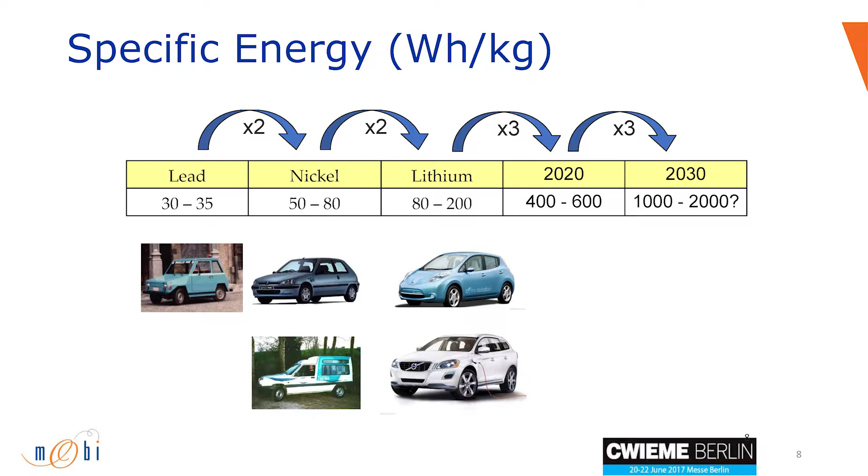But then later, in the 90s, the first mass-produced vehicles came on the market with nickel metal hydride batteries, already doubling the capacity. Then we all know the later generations with the Nissan Leaf and so on, based on lithium batteries. There again, capacity doubled. And now towards 2020, we probably will see something like 400 to 600 watt-hours per kilogram on cell level. That will be in the next generation cars.

And we see post-lithium 2030, what will happen then? We might even go further. So the range is still a little bit of an issue, or at least range at an affordable price is still an issue, but it's going to vanish in the coming years.

As you can see here, the evolution of the battery price the last 5 to 6 years decreased from $1,000 per kilowatt hour to 200 and a little bit nowadays. And it's foreseen that by 2020, probably the cost of a battery pack will be about €100 per kilowatt hour. So it's going really down.

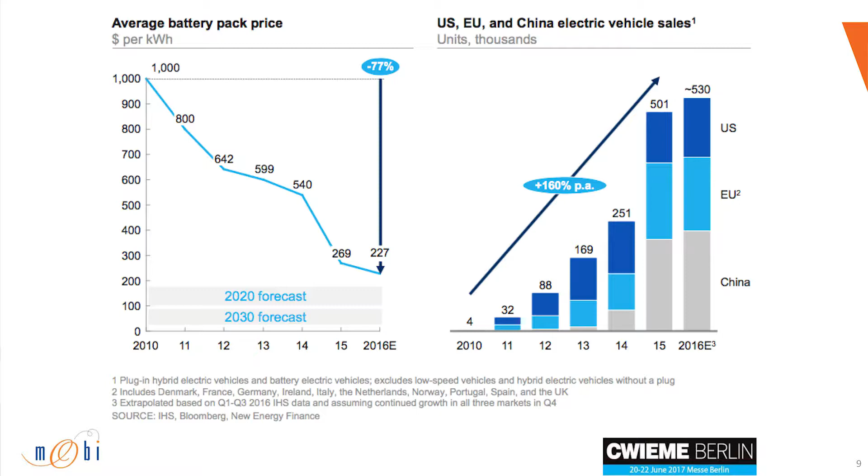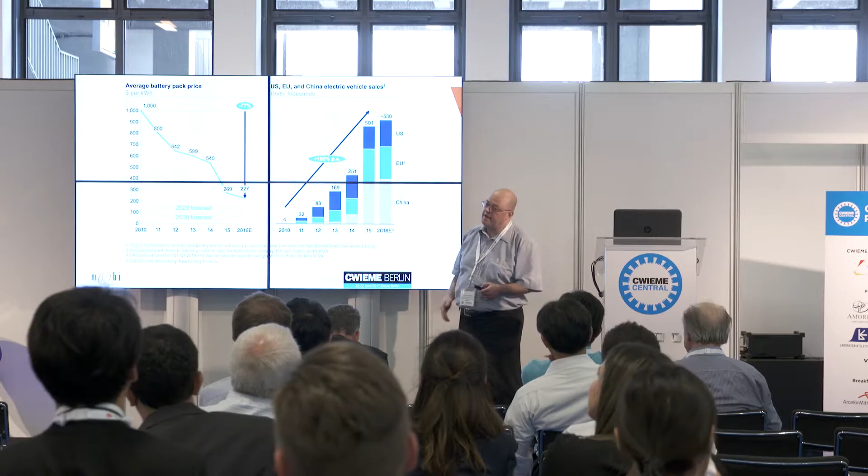And you can see this in the increase of sales of electric vehicles, that it's still a small market share, but the climbing is steep. So they're gaining market share.

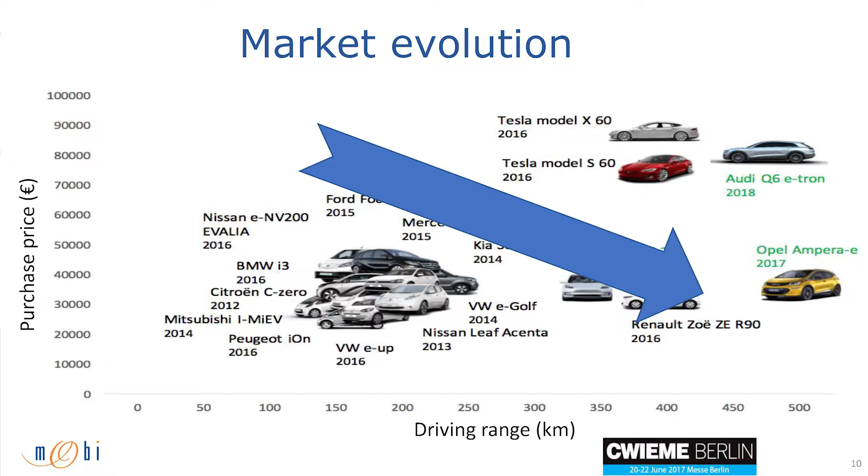What you can see is that the last generation a few years ago were basically in this part of the market with a limited range, like 120 to 150 kilometers, at an affordable price of 30 to 40,000 euros. This was the biggest market segment that was there. And if you wanted a higher range, you had to go to a Tesla or something, and pay like 80,000 euros.

And now what we see is this new segment in the market that's coming up: affordable cars, 30 to 40,000 euros, with longer range, 300 to 400 kilometers. And it's generally accepted that 300 kilometers is a kind of tipping point that would make customers willing to buy an electric car, as it would mitigate range anxiety at that moment.

And there are different models coming up, the Renault, the Opel, but also the Chevy Bolt and the Hyundai Ioniq. So there are changes in the market. By the way, if you want to know how sales of cars are evolving and how infrastructure is evolving in Europe, I invite you to go to the website of the European Alternative Fuel Observatory. There you can find all the statistics of all European countries on this.

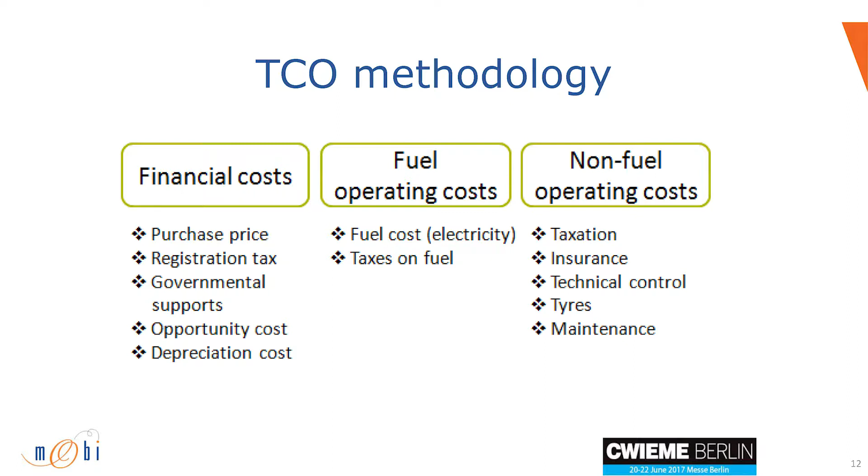Right, okay. So purchase cost at the moment is still a little bit high. But what about total cost of ownership? It's kind of a different figure, because purchase is higher, but operational cost may be lower.

So if we calculate the total cost of ownership, we not only have to take into account the financial costs, just as purchase price, taxes, depreciation costs, and things like that, but also look at operating cost, especially fuel cost, because it's half the price to drive an electric car with electricity than using fuel. And then, of course, you have some other costs that aren't that much different, besides maybe maintenance.

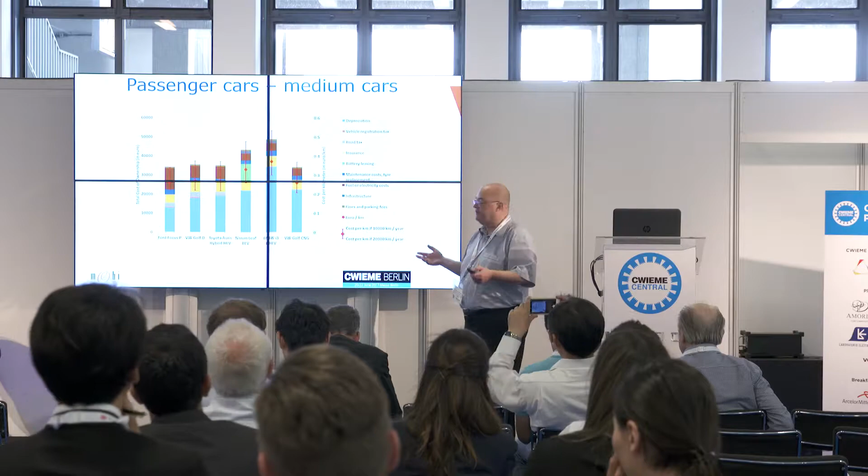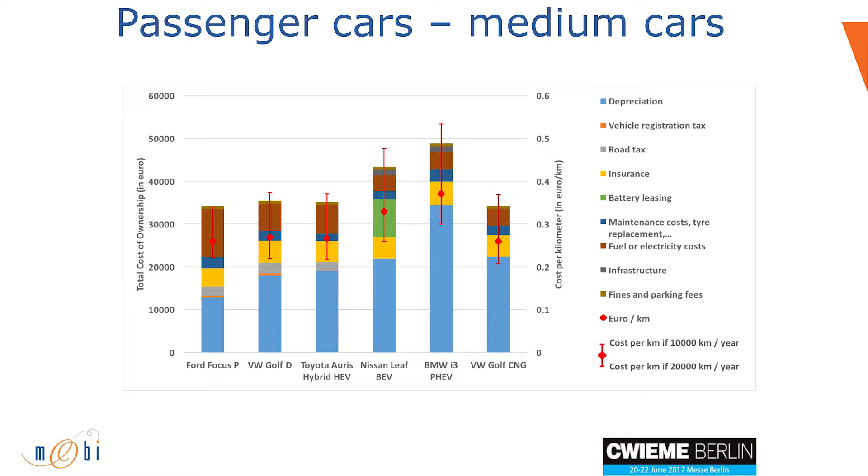But if you look at it, we did this for the Belgian market. For a typical medium-sized car, Nissan Leaf-like, we made a comparison of total cost of ownership between a classical diesel or petrol car and the Nissan Leaf and BMW i3, for instance. As you can see, there's a big difference in depreciation costs between those and the combustion engine equivalent, because nobody knows what the resale value of an electric car is after 8 years.

So it's hard to compensate. Here you see the fuel costs - they're definitely smaller here, but it's hard to compensate. So it's still a bit difficult. However...

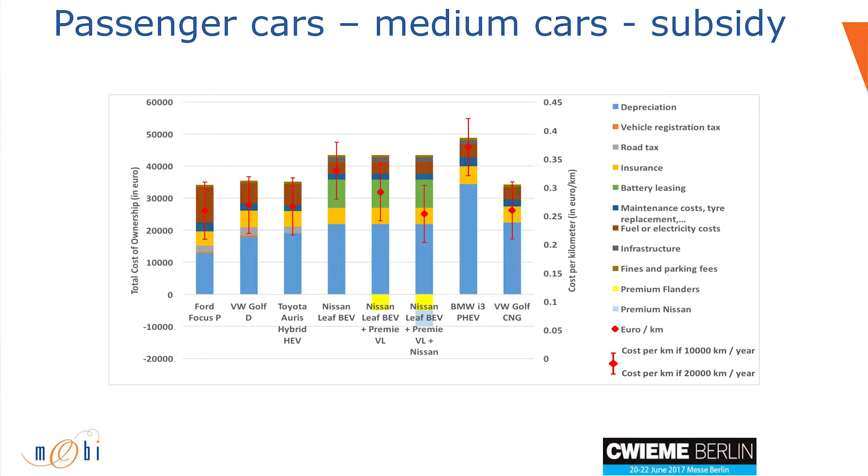if you look at incentives now in Belgium, well, in part of Belgium, the north part, the government started this year to give incentives, and you can see that at that moment the total cost of ownership becomes comparable to the other ones. Even more, if Nissan itself gives an incentive, it becomes really, really comparable. So if manufacturers and authorities work together, they can make it the same price, so that you can have a market breakthrough at that moment.

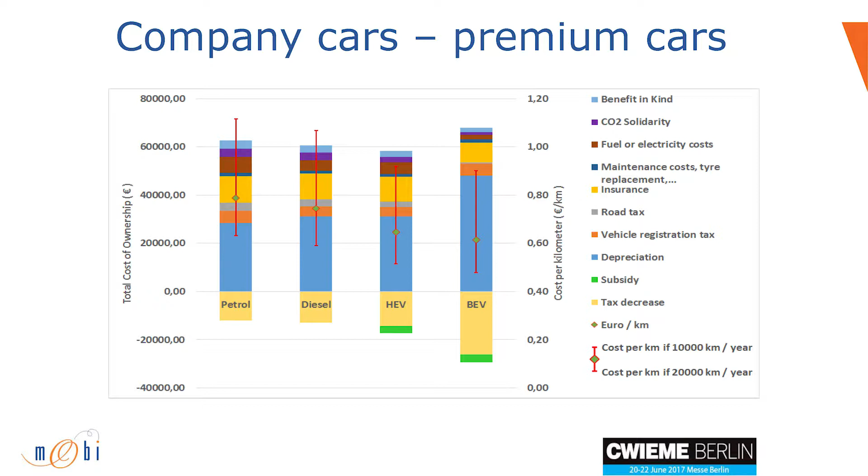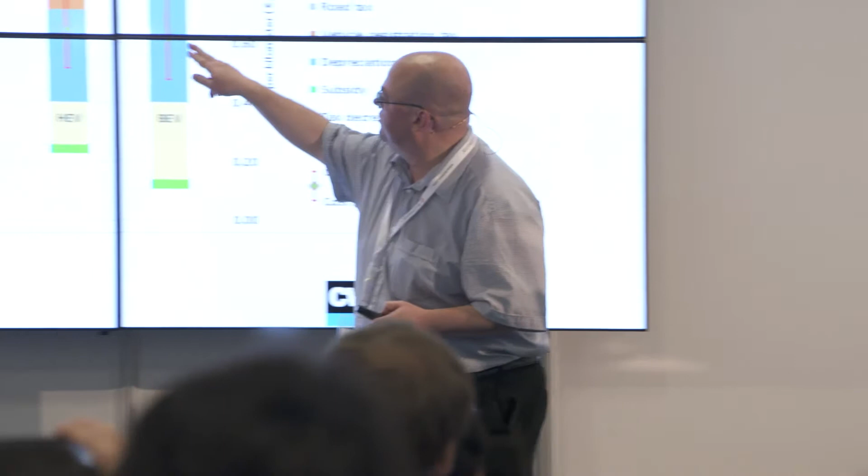Another thing in Belgium is that if you have a car for your company, you can deduct 120% of the taxes, and we can see this in the market for big cars. Here's a comparison of total cost of ownership of big company cars. The tax deduction makes this type of car really cheaper, even than a classical combustion car. That's why a lot of company owners now drive a Tesla in Belgium.

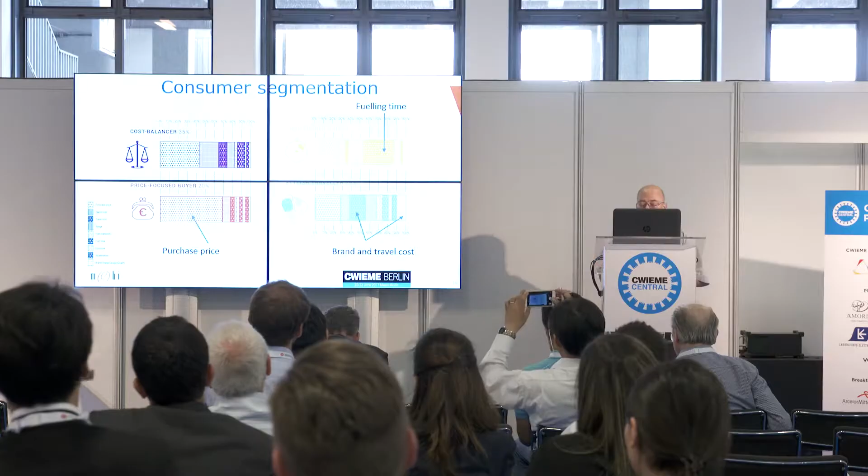Okay. So if electric cars are penetrating the market, who will be your early adopter? Who will be the first to buy such a car?

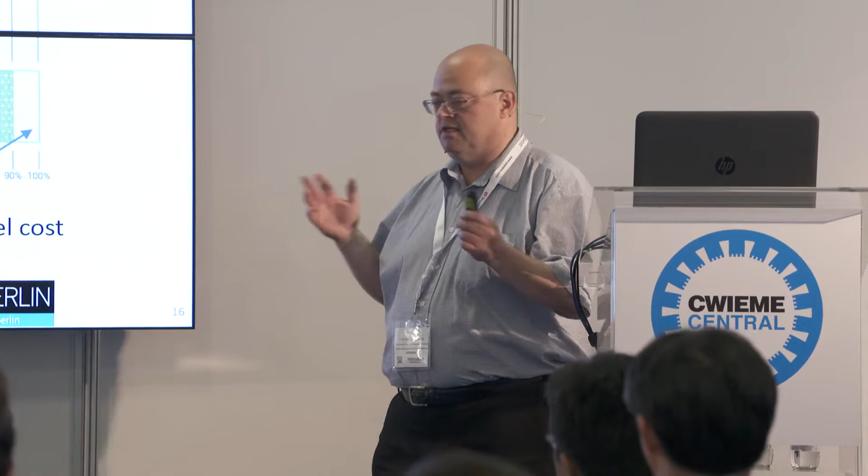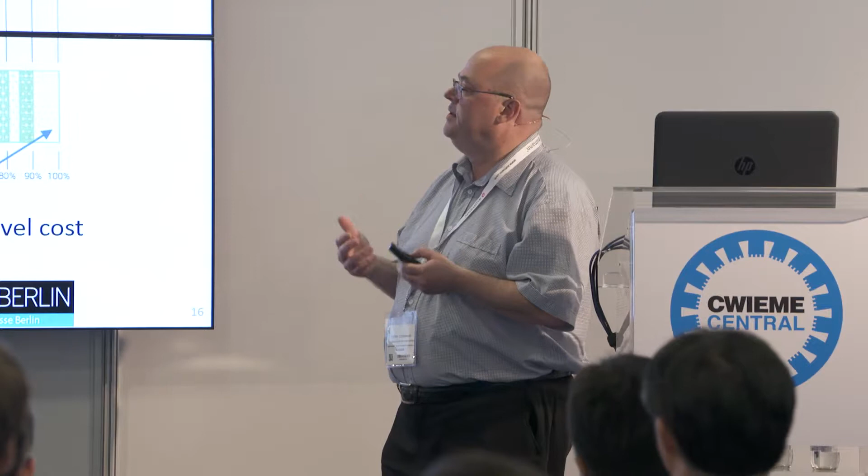Well, we did a choice-based conjoint analysis survey in Belgium, which allows you to understand the criteria somebody uses to make a purchase decision. We did this with 1,600 people in Belgium. Based on their preferences in buying a car, you can segment potential customers into 4 different groups, and see which one would be most likely to buy an electric car. So we split it into 4 kinds of potential customers.

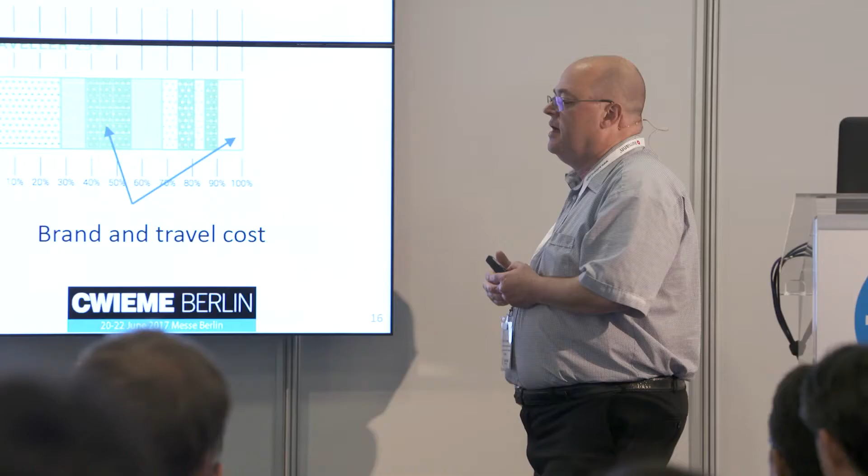First, there's the cost balancer. For him, the purchase price is important, but he also looks at the operational cost afterwards. So he really looks at the total cost of ownership - he's one of the first potential early adopters of electric cars.

Then you have another group, which is how a lot of people still think - somebody that looks only at the purchase price. It's too expensive, so they just don't buy it. They're probably the laggards in the adoption curve.

Then you have another group for which the fueling time is really important, so they don't want to change anything about their habits. They want to go, put fuel, 5 minutes, go on - and they're also behind. They will not buy immediately.

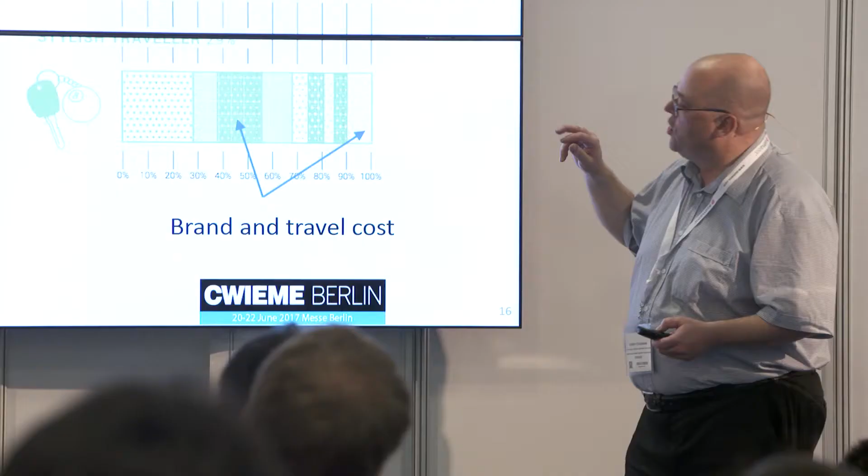Another group interesting for electric cars is the stylish travelers, who look a lot at the brand - it's nice and fancy to have an electric car. They're also an interesting group for manufacturers to target. Mostly this group and the cost balancer group are young, educated people with some money, rather than older people alone.

So yeah, this is just an overview. I will skip this because we're running out of time.

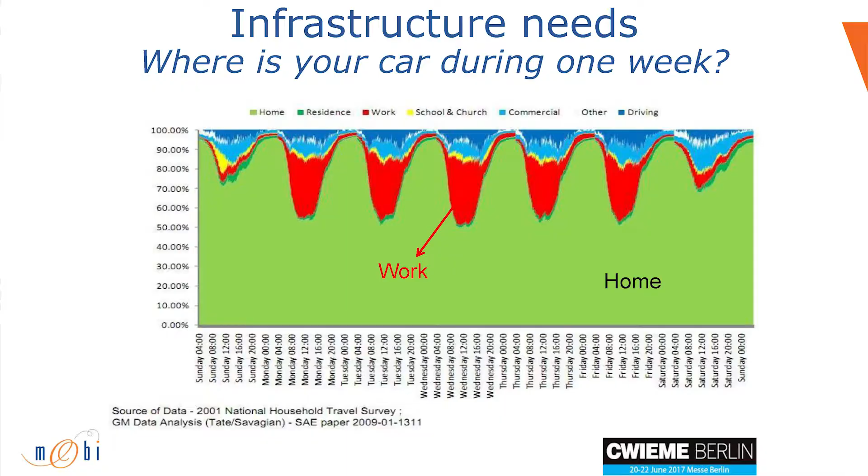Okay, last point: charging infrastructure. It is important to deploy the right amount of charging infrastructure in the right place. Now, where should we put this charging infrastructure? Well, for that, let's see what a car does during the day.

Here you see 7 days of a week, and the activities of the car. The first thing you can see is that most of the time the car is not driving - hardly 10% of the time is the car moving, mostly it's standing still. First conclusion: we can probably use cars for balancing the grid and things like that.

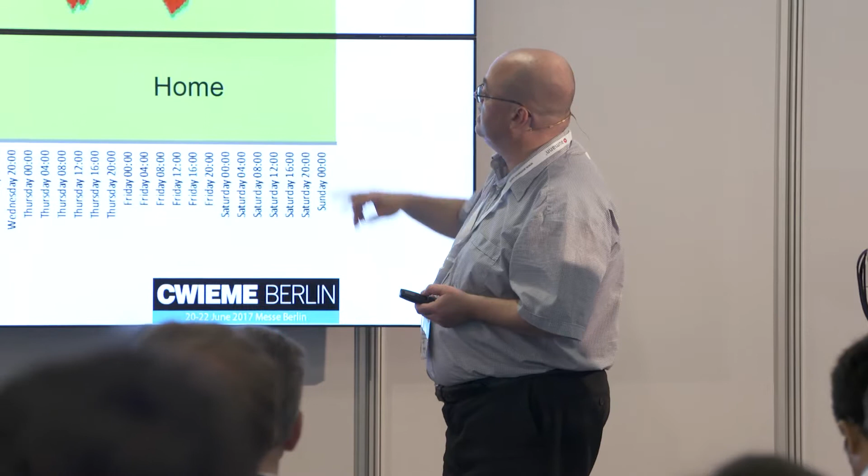Second, what we see is that most of the time the car is at home. During the week, of course, it's at work as well, and on the weekend there's some shopping. But most of the time, your car is either at home or at your workplace.

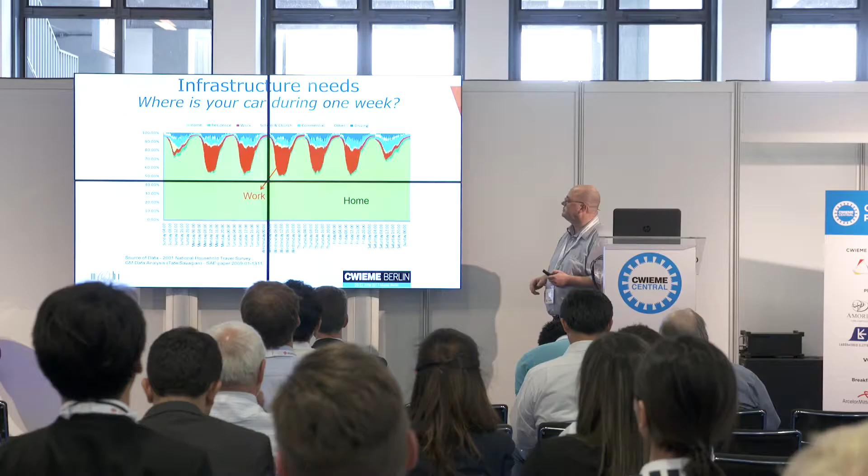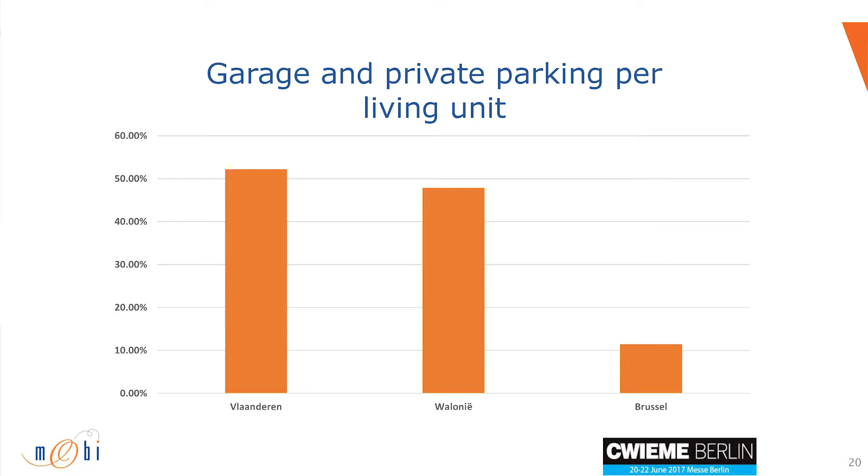This is something we did for Belgium. We have 3 regions in Belgium: the north called Flanders, the south called Wallonia, and in the middle we have Brussels. In 2 of those areas, 50% of people have a garage and can easily install a charger at home. In Brussels, it's an issue—only 10% have a garage. So there, they will need to rely on charging infrastructure on the street.

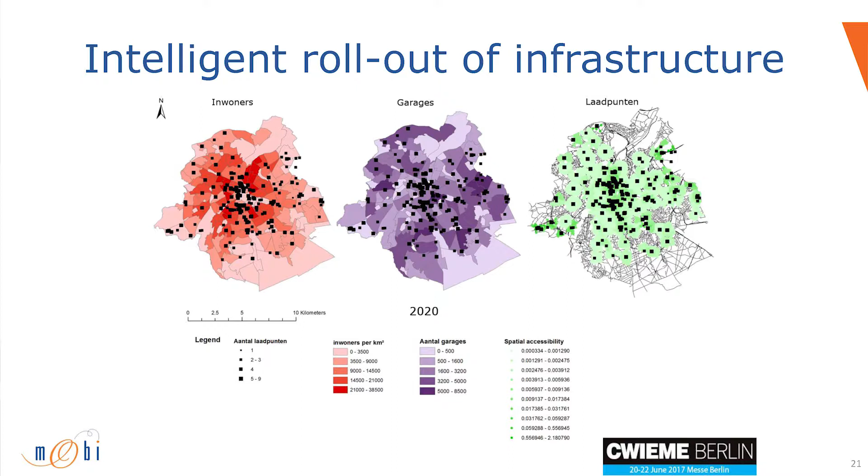Coming to that, we did a study based on GIS, Geographical Information System, for Brussels on where to put charging infrastructure. There you use data to see where possible early adopters can live, where there are no garages, where it's densely populated, where there are electricity lines, and things like that. If you combine those parameters, you can actually pinpoint places in the city where you should add charging infrastructure.

This was for slow charging, normal overnight charging, let's say. For fast charging, it's a bit different. Fast charging is rather focused on going from one urban area to another. We did a study for Belgium for that, to see where are the best areas. We have about 100 charging points in Belgium now, and we did a study on which are the best areas with respect to accessibility of fast charging.

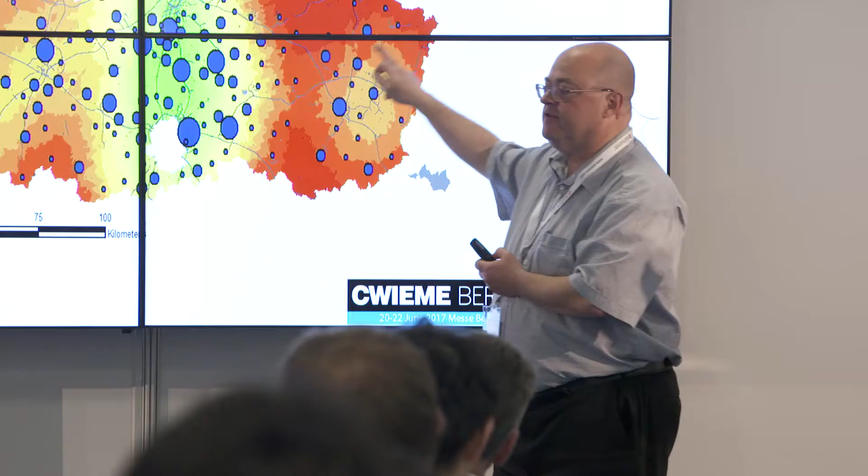You can see that the green area is the best accessible—it's the area between the main cities, Brussels and Antwerp. But these blue dots show where the biggest communities of electric vehicles are. For instance, what we recommend to our government is that here there are some big communities and no charging infrastructure. So we use this planning to develop and deploy fast charging stations in Belgium as well.

And then finally, the next step will hopefully be some inductive charging lanes that go from one city to another, but that's far future, I'm afraid.

Okay, so once again, a key issue in developing electric vehicles is total cost of ownership, among other things, so Omar will speak about that in his talk.

Yes, thank you, Thierry. It's my turn. I think Thierry took more time than we expected, okay?

Thierry mentioned that TCO is really a key issue, but we look behind the TCO: what is the correct design for the drive system of electric vehicles? So I will share my presentation: a small introduction to powertrain technology, our topology and modeling approach, the co-design framework, and then a small case study on what we did in Brussels. Then I'll make some conclusions and discuss future trends. So I go to the trend.

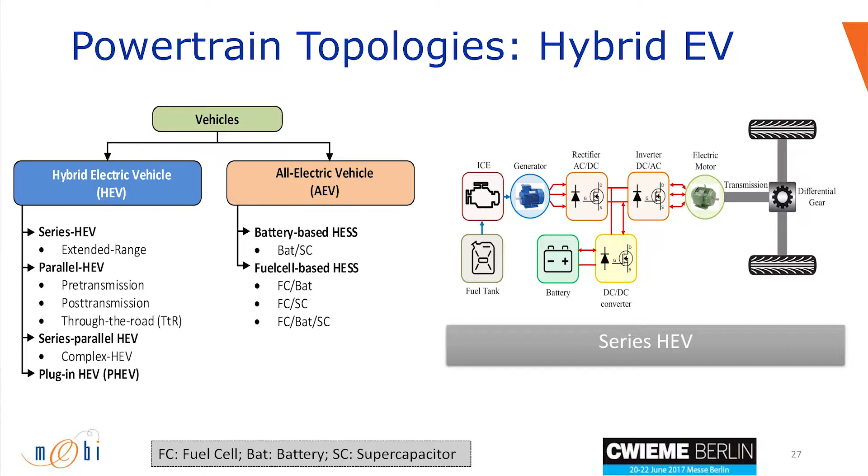What's the type of technology now? We talk about electric vehicle, hybrid. Hybrid electric vehicles can be classified as series hybrid, parallel, pre-transmission, post-transmission, and also front and rear connection via road. Then you have combined systems, called complex series-parallel, and plug-in hybrid. For electric, we call it all-electric vehicle, which could be battery-based, like Thierry mentioned, and we also have fuel cell battery vehicles, which could be classified as fuel cell battery, fuel cell supercapacitor, and fuel cell battery combinations. As you can see here, this is an example of series hybrid.

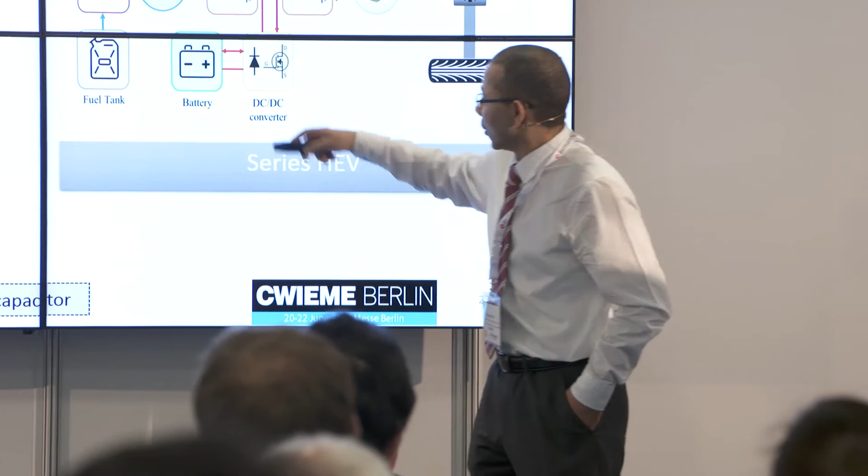I don't know, the pointer doesn't work. So the engine, then you have the generator, and rectification, then inverter to electrify this, transferring the electricity from DC to AC, and then the induction motor. Of course, to improve the performance of the engine, we have a battery integrated, and in this case we can improve the performance of the vehicle.

Second one is parallel. So instead of electric coupling, you have mechanical coupling between the electric axle and the engine axle. Again, we have a battery to improve the performance of the vehicle.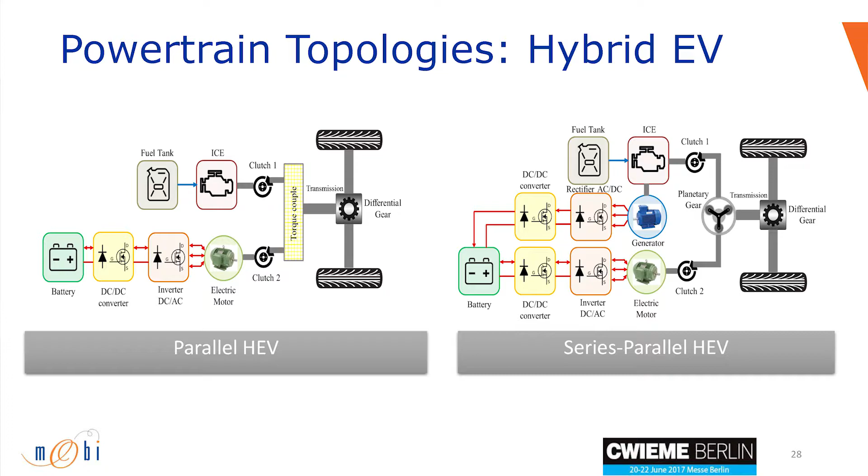And then we have the combined system. As you can see here, we have a planetary gearbox, a mechanical connection with the engine and the tank, and then the battery—two ways you could charge it, from the engine itself or use it for traction. So you have different modes, and of course the system becomes more complex, so you need energy management to manage these parts.

As you can see here, how we can improve this hybridization—you can start from a conventional vehicle. Of course, the conventional vehicle's engine has low energy efficiency. If you go to electric diesel, meaning series based on diesel, you can improve the efficiency slightly.

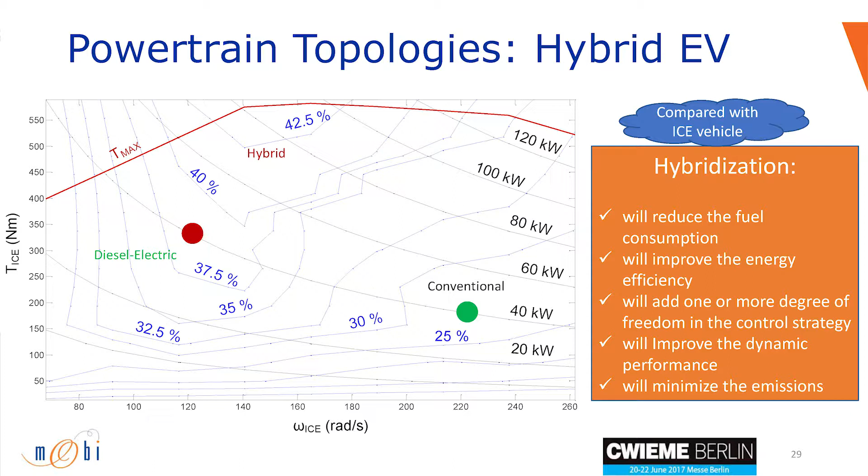And then you can go for hybrid, fully hybrid, and now we can reach around 41% or 42% efficiency. So there is a need for hybrid system.

So you need to integrate battery in the system. And how we can do that? Why? My answer is to improve the fuel consumption. That's one answer. And of course, to increase or improve the energy efficiency. And then you can make more degree of freedom to control the system. And after that, of course, you can gain also in the TCO. Of course, you also gain in emissions. Like Thierry mentioned, there's a huge impact on emissions, so we need to tackle this issue for climate change.

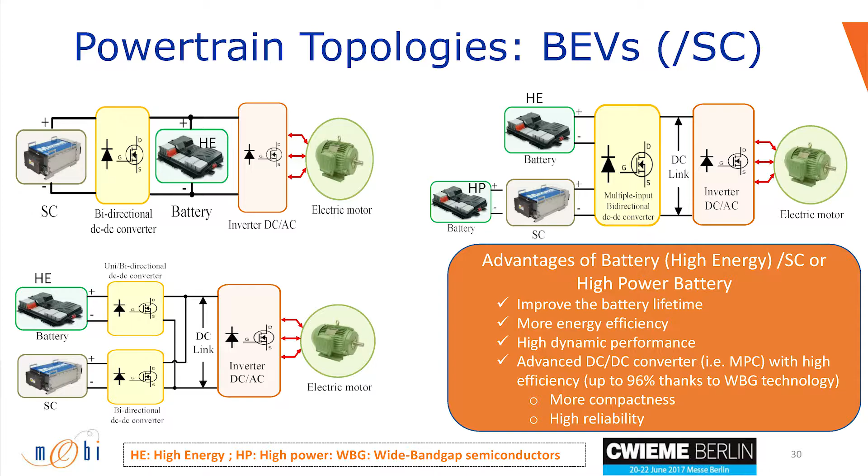And this is compared to conventional system. If you look at battery system, how we design the battery system and drivetrain - as you can see here, we have different battery types, high energy, high power. And if you use high energy, you need to assist the battery during acceleration, so you need to add a supercapacitor system. As you can see on the left side, the battery is the main traction system, and the supercapacitor assists the battery bi-directionally during charging and during acceleration.

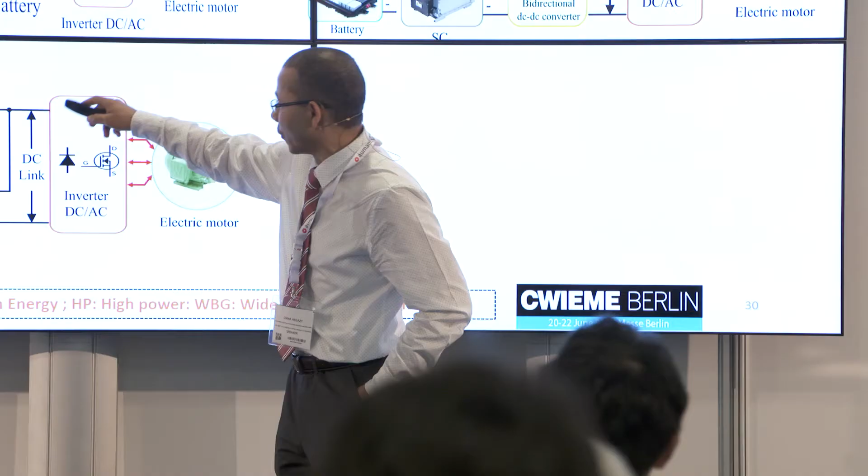And then we have another type of configuration, so we have a lot of configurations that give more flexibility due to the integration. So we need also advanced converters - multiple DC-DC converters, and then we have the supercapacitor. You have more freedom to control the energy coming from the battery and supercapacitor. And then we have other advanced technology - one common DC-DC converter that integrates the battery and supercapacitor. We use common thermal management, common or centralized control, as you can see here.

And then you can control that - battery goes here. So you can use a supercapacitor with a high energy battery, and then you can integrate high power with high energy. So we have more flexibility to control multiple sources to satisfy the needs of the vehicle. And then you have the advantages of this.

Hybridization, electric - so we can improve the battery lifetime. This is a key issue, so we need to improve the lifetime of the battery. And of course, this will lead us to increase efficiency, because if you improve the energy content of the battery, it means you gain also in the range. And then you can also include inside the DC-DC converter advanced technology like wide band gap technology, SiC technology, GaN technology, and now we can gain more in efficiency. Once you gain in efficiency, you can also improve the energy efficiency of the whole drive system. And of course, this brings more flexibility and also more reliability.

So how can we go for fuel cell? Thierry mentioned electric vehicles, but there's also fuel cell vehicles. So what is the challenge there? Looking at the fuel cell: low dynamics, high cost, high size, and no capability to recuperate energy from regenerative braking during driving. So there is a need again for hybridization.

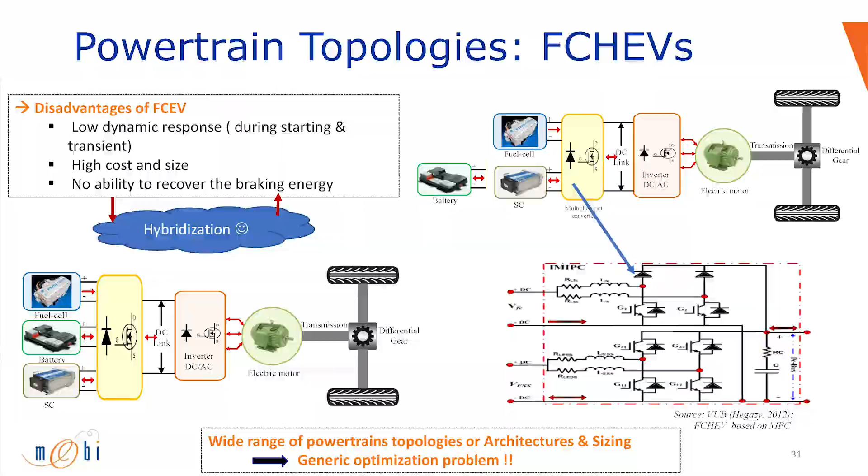So we need to hybridize this fuel cell with battery or supercapacitor. As you can see here is the first trend of fuel cell integrated with supercapacitor - we can gain in this traction system, or we can integrate fuel cell with battery with the same content of the drive system, or we can merge the three sources. Of course, it will give more freedom, but also more complexity in the control system. And this is why we can gain in this drive system with multi-port.

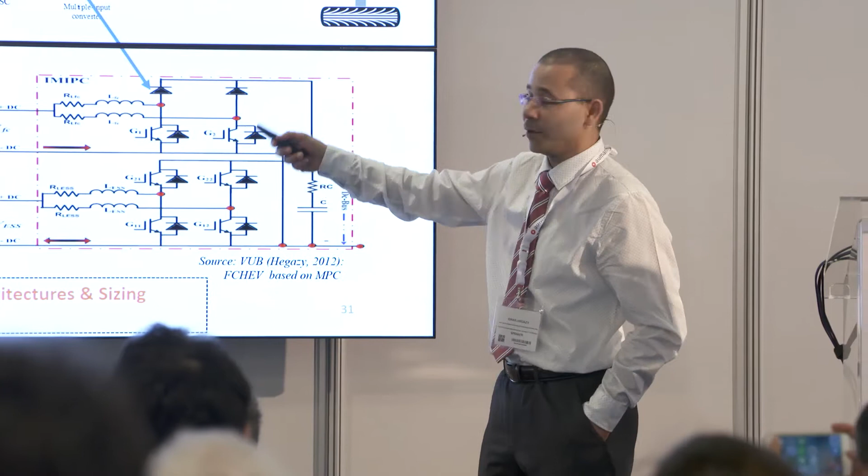We can use advanced technology like interleaved DC-DC converters that manage the energy transfer between the sources and the traction motor. So I'm going to share with you the modeling - how we design the drive system, how we make modeling that fits our design and also delivers the needs of the user.

So we need to highlight that there is a need from the user to achieve TCO minimization, and also energy management or energy efficiency should be higher. So I'm going to show how we can do this.

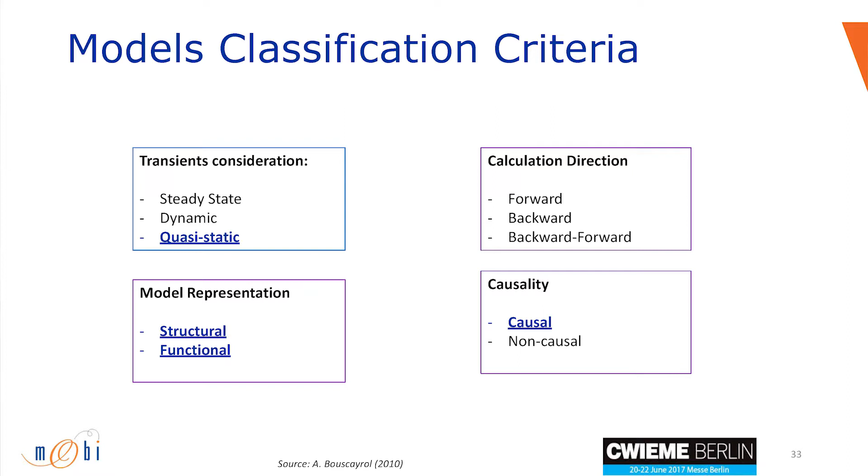This is a classification of the model. So we look for a model that can achieve transient consideration - a steady state of the vehicle, or dynamic, or quasi-static. And then model representation is structural or functional, and the calculation of the model should be forward, backward, or backward-forward. This is the idea of how we can make the modeling of the drive system. And then you go for causality - causal or not causal - and then we can go for actual design for the vehicle. So I'm going to show how we can make the modeling approach.

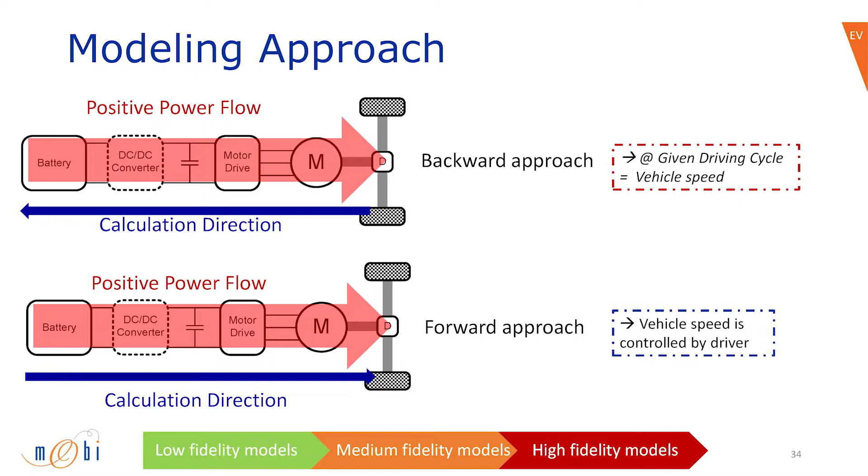There are three main approaches. The first is called the backward approach, based on the direction of power flow. You have the positive power go to the wheel, but the calculation in this case comes from the dynamic, meaning that from the wheel itself you get the dynamic of the vehicle, calculate the efficiency map of the motor, drive and DC converter, and then size the battery. This is based on a given drive cycle.

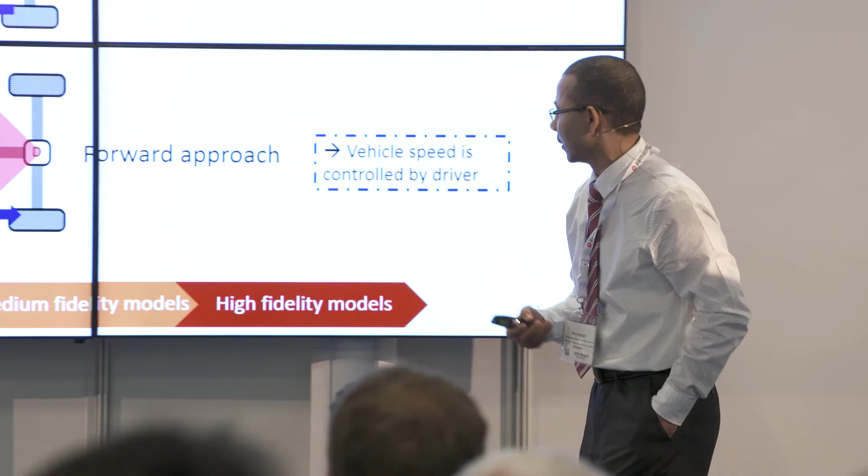The second approach also has positive power flow, but the calculation comes from the battery. So we have the battery, then the DC converter, motor and inverter, and then the dynamic of the vehicle. This is based on the driver itself, who gives a signal: I need to deliver this torque to the wheel, and the battery should respond to this need. This is what we call the forward approach.

The third one is called... I think one is missed. Okay, and then this is based on the model that you use.

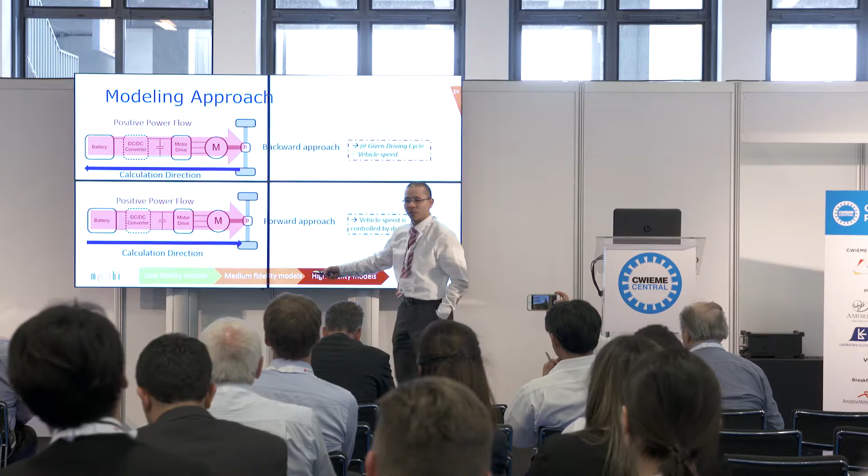Low fidelity model is like an efficiency map, or a medium fidelity model, or a high fidelity model. This depends on the complexity or trend of the model itself. Low fidelity model means we talk about half a second or one second for the modeling. You can make a block set of each component integrated together, with an execution time of half a second or one second sampling time.

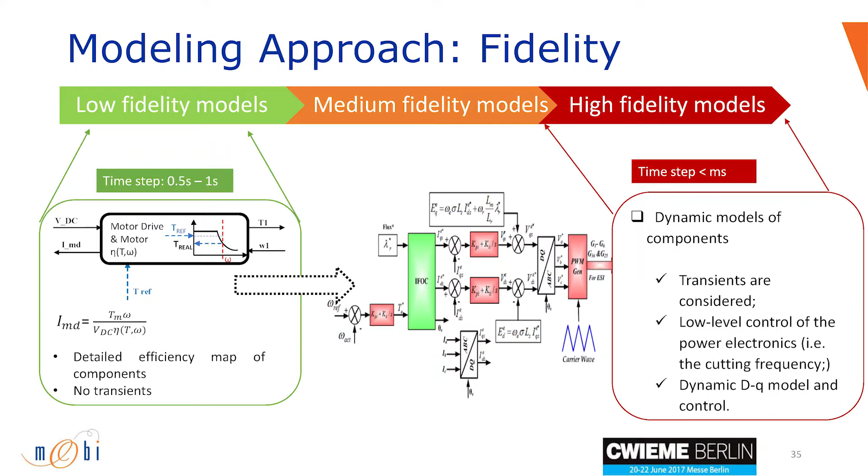If you make a small block for the motor and the inverter, you can take the efficiency map based on torque and speed. The torque or efficiency map of the motor has constant torque and constant power regions, and based on the operating point you get the required efficiency. This is why the efficiency map is detailed, but there is no transient. If you go for complex modeling, you have a really detailed model for each component, like the motor.

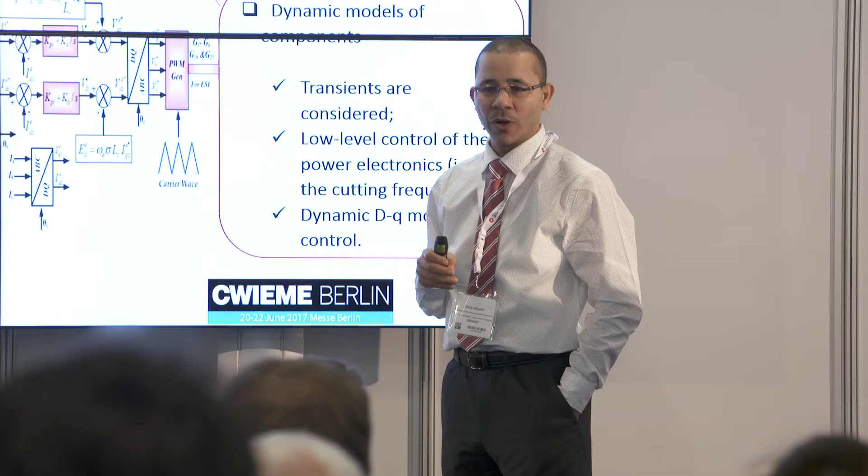If you model the motor in detail, you go for a DQ model, meaning you transfer the motor to DQ modeling, and also design the control. If you design the control, you have to respect the control bandwidth for acceleration and deceleration of the motor, meaning you need sampling time lower than a millisecond. This takes more time to make the modeling of the system.

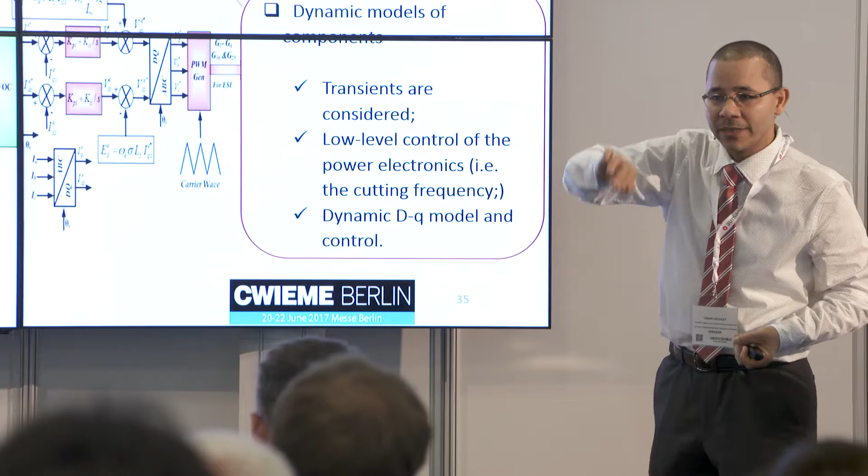We need more dynamic models. Transients are already considered, so you can see the transient of the machine itself or the transient of the switching of the inverter and so on. This is why we call these high fidelity models.

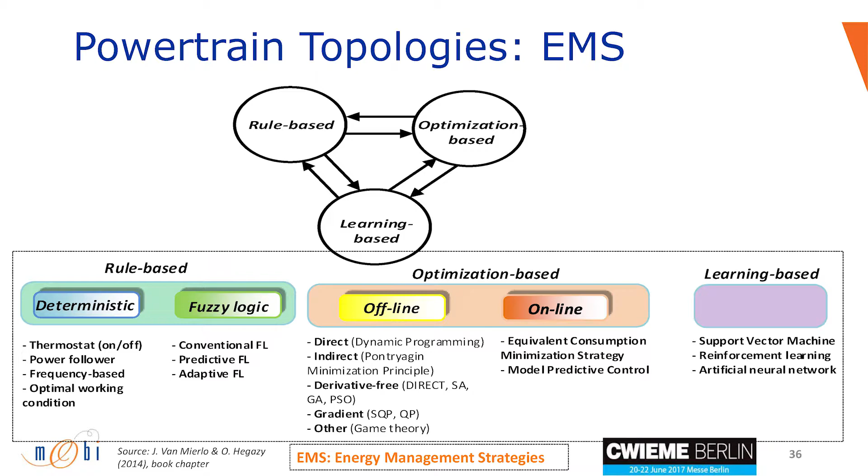We know how to make the modeling, integration and so on, but there is also a need to make the control itself. So how do we make the controls? There are a lot of control techniques based on rule-based, optimization-based, or learning processes. We have different categories: rule-based can be divided into deterministic or fuzzy control, and below these categories we have different controls that could be used.

If you go for optimization techniques, we have online and offline. For reality we have online to emulate or simulate the real drive vehicle, but engineers would also like offline optimization for the drive system. So we have a category of optimization techniques that could be used for optimizing the design or the control.

Then we have learning-based techniques, where you build neural networks, use real data to train your system, and then let the system work for real demand or real inputs. We call this learning-based, and this means you could step forward toward an automated car.

So you have an automated car that has to be driverless. This means you have to make the learning process for this car, and then go out for actual driving. This is the driving system.

So what we have to do is make a representation for the forward calculation or backward calculation. We can start with the forward calculation: the driver gives the speed he needs, and the energy management gives the set point for the torque required from the electric part, and the set point for the mechanical part.

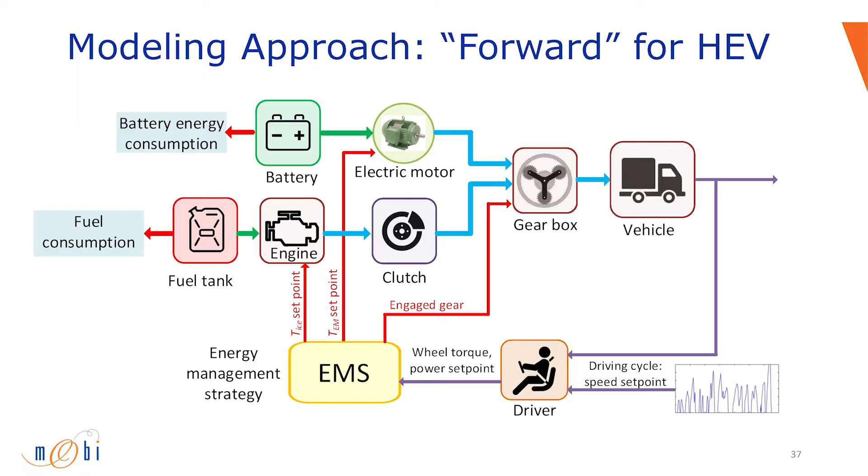And then we have this forward calculation for the drive system. Then we have backward, where the drive cycle is well known. We add the drive cycle to the vehicle dynamics.

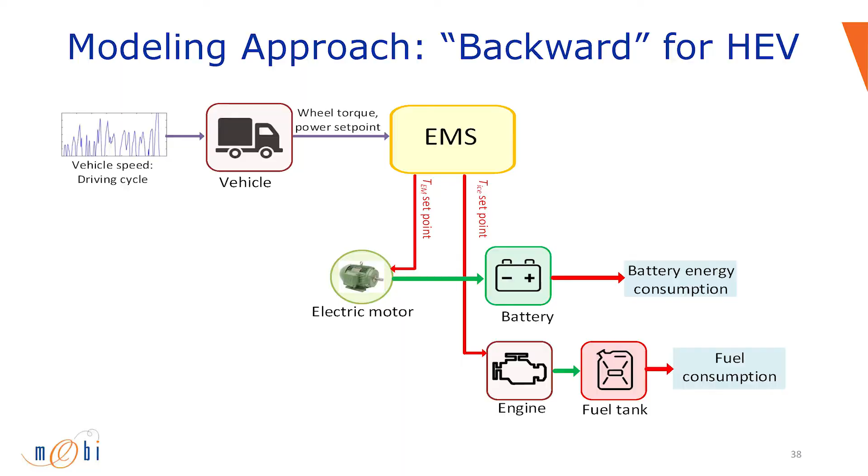We calculate the torque, and from the power need and torque need from the wheels, we have the energy management that also differentiates between the torque required from the battery and torque required from the engine. In this case, we calculate the energy consumption.

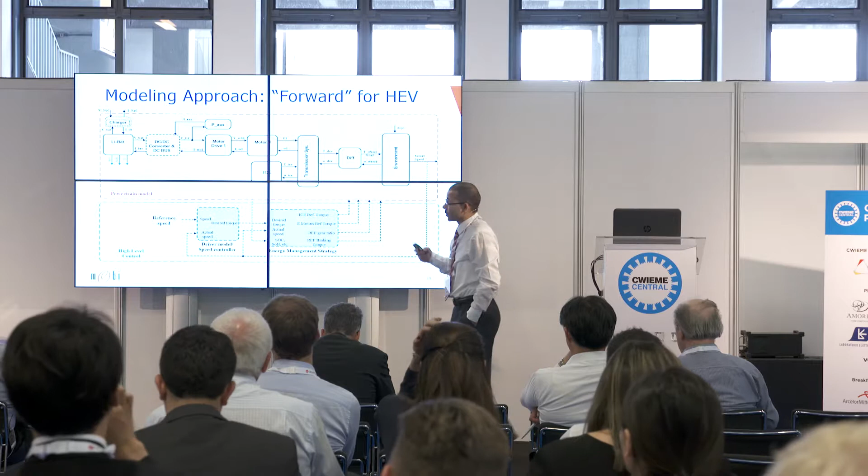And then we have the representation for the same forward calculation. You can see here we make the input-output interface during the modeling. So we have the model of the battery, the DC converter, the motor, and so on, transmission.

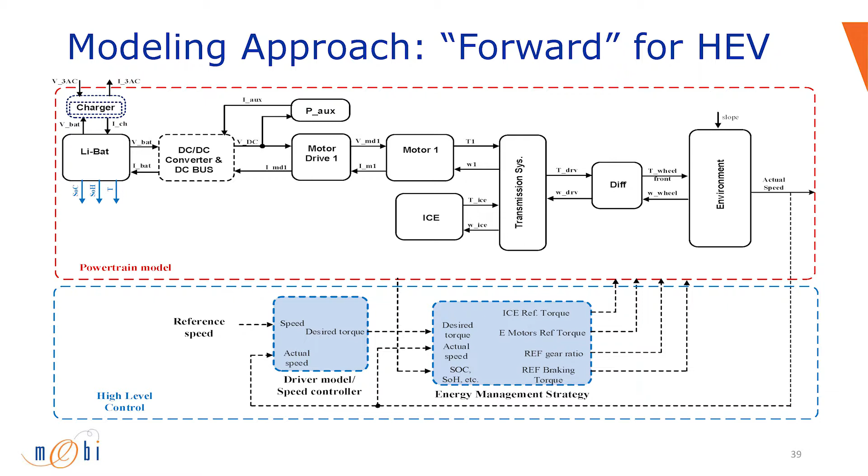And then you have a detailed control algorithm where you have the measurement, the state of health of the battery, state of charge, and then you get the splitting between the two sources.

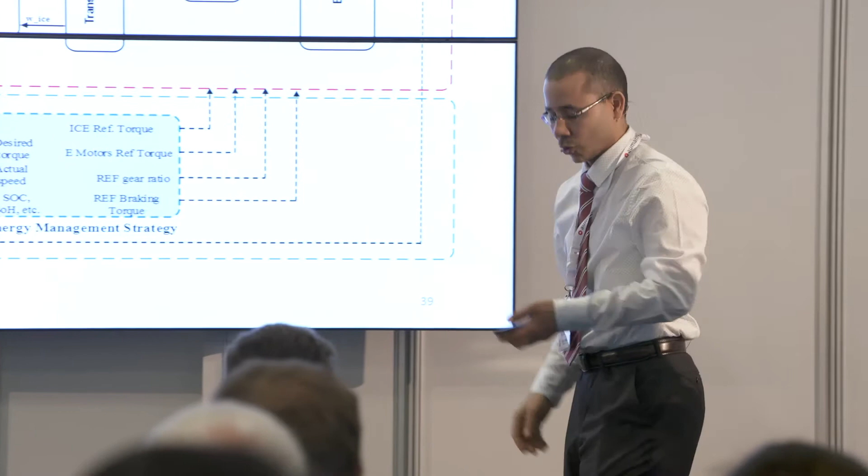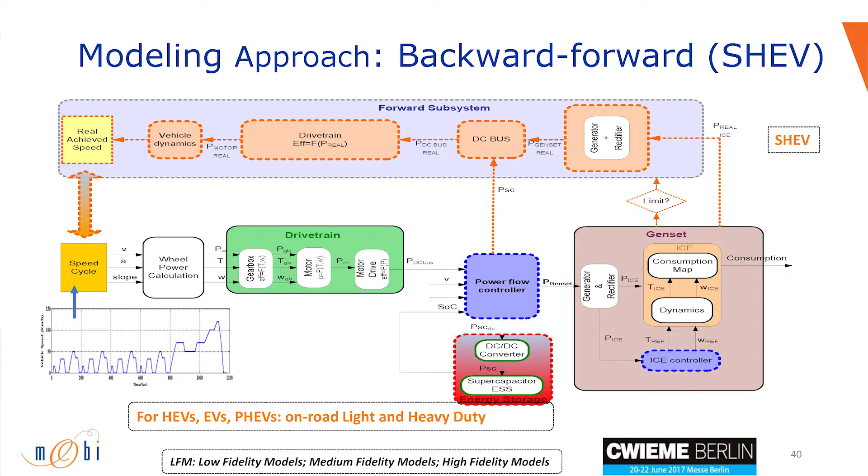And again, for another approach, we combine forward calculation and backward calculation. As I mentioned, you have the drive cycle, then the electric drive system, the energy management, and then you go back again to ensure that what you asked for is already delivered.

I'm going fast because the timing is very short. We did some analysis for the impact of the energy management on the vehicle itself.

As you can see, if you have a series hybrid with supercapacitor and the engine, you can see here the distribution of the power. So we have the drive cycle, and how we are going to make the distribution between the engine and battery.

So we make use of on-off control. That means if you have high torque, the engine should deliver torque. If you have less torque, the battery or the supercapacitor should deliver the power, as you can see here.

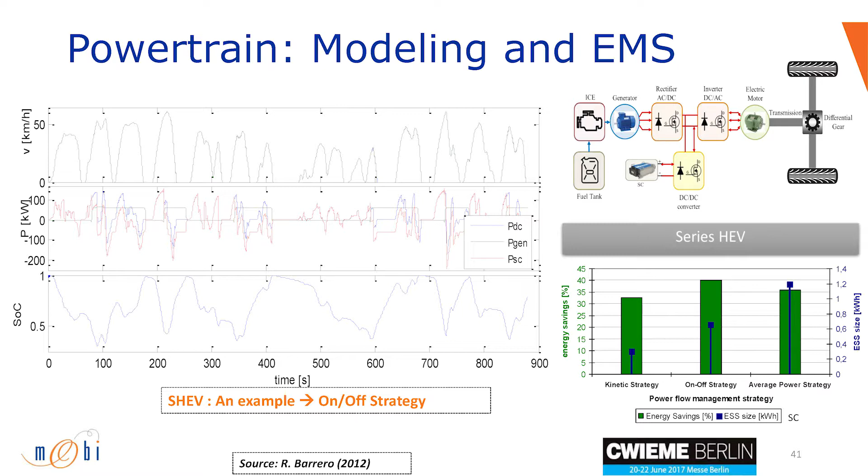So this is the trend of the state of charge of the supercapacitor. And what we gain here is that if we change the control strategy, we could gain on the energy saving. So you have here the energy, the size, and the energy saving.

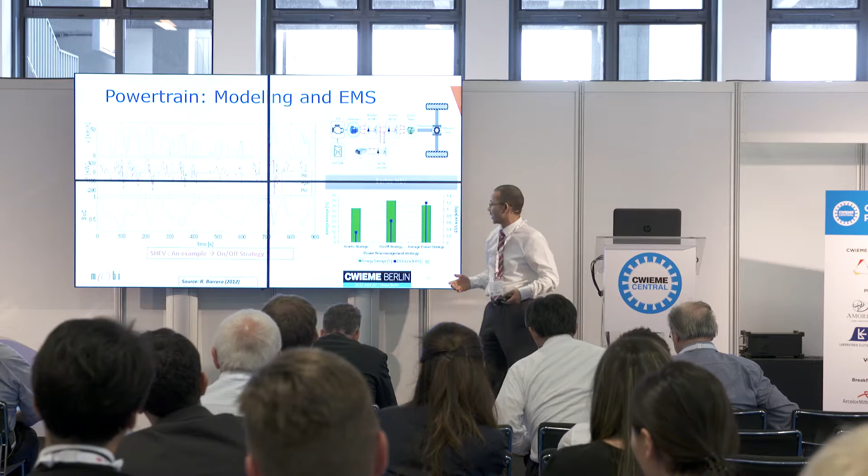If you put this energy with this amount of electric energy sources, like battery or supercapacitor, you gain in energy saving around 30%. If you increase it, you will have also 35%, but another energy management could be used to minimize the system.

I'm going fast for this, the co-design. I know this is too fast. So actually, the co-design, I mean, you start with the topology like I mentioned before, then you select the sizing of the battery and supercapacitor and so on, and then you optimize the control.

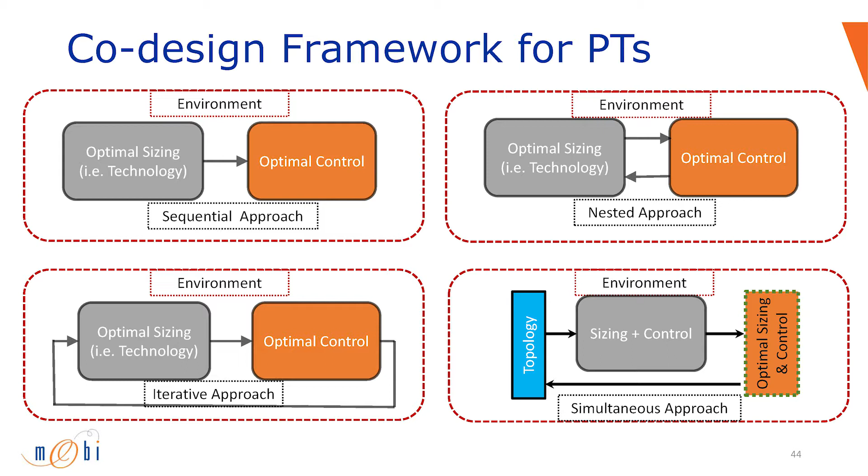And this is how we can make the optimization of the drive system. So what we could do is called sequential approach, or nested approach, or iterative approach, or simultaneous one, where we could have the trade-off between the sizing of the component and also the energy management.

And get the trade-off between both of them. So I'm not going into detail on this, but due to time.

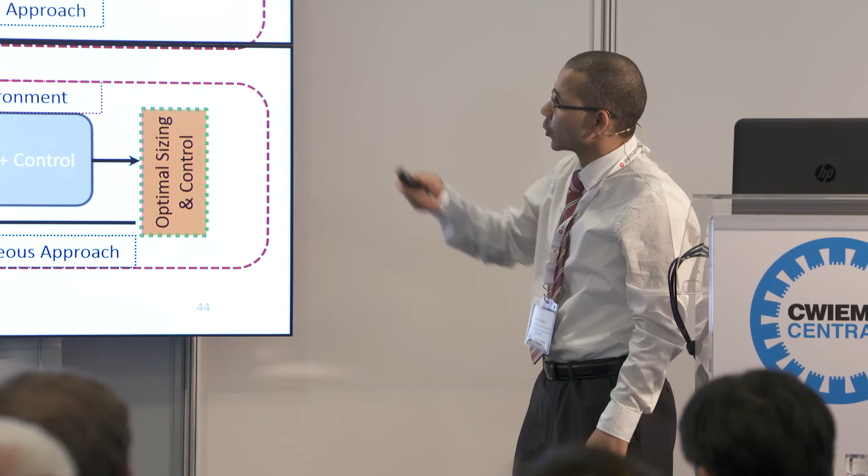So I'm going for the case study of what we did in Brussels. In Brussels we have a huge demand on electrification in the city, but here it's buses, not passenger cars. What we have is a standard 12-meter bus, and we have 3 lines.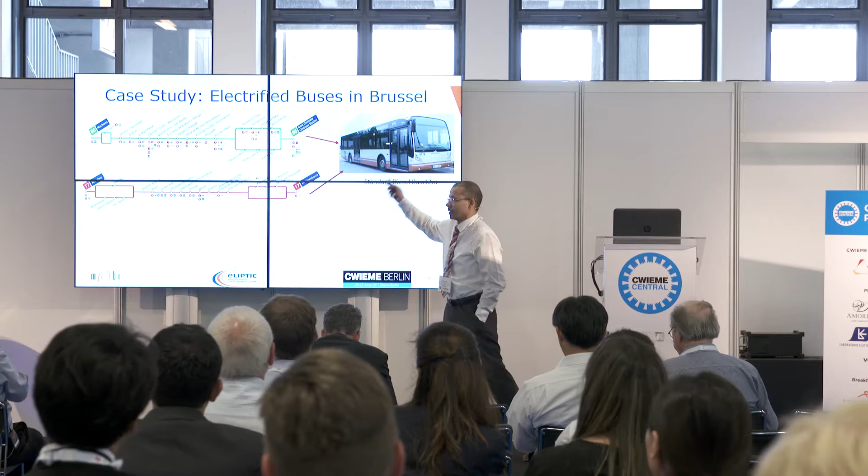2 lines are 12-meter, and the third one is 18-meter buses. How we are going to use our knowledge, our co-design, to make the electrification in the city in a good way, and also how we can make the location of the charger in cities.

So what we did already, we have this standard, based on the requirement of the city. They mentioned that line 86 and line 17 are standard, with overnight charging. There is no on-road charger. And the 18-meter line is on-road charger.

And we can implement 450 kilowatt. In this case, we look for the specification: which type of battery, the energy content, the voltage of the battery, and also charging power, charging time, and so on.

This is a look at the characteristic. We get the measurement from the city, and based on the measurement, we designed the electric bus. So what we got, we use our co-design iterative approach, and we get this basic system like we did before.

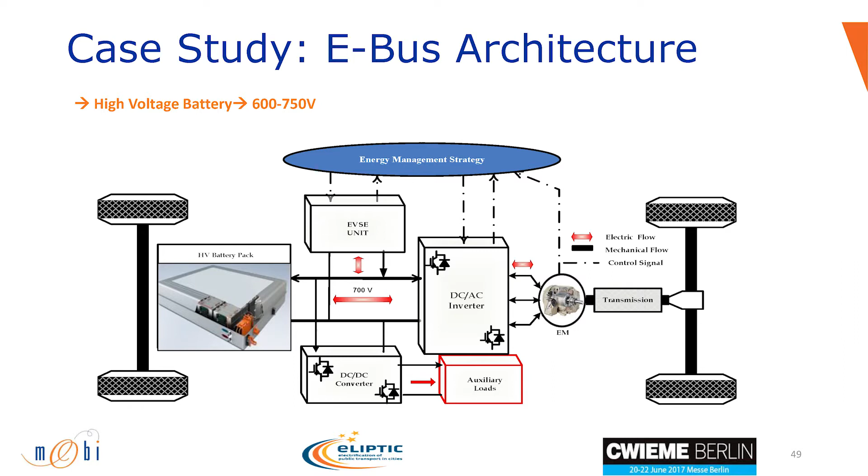Battery, and then inverter, motor, and then we make the energy management. And once we get line 86, we calculate the back-forth energy content.

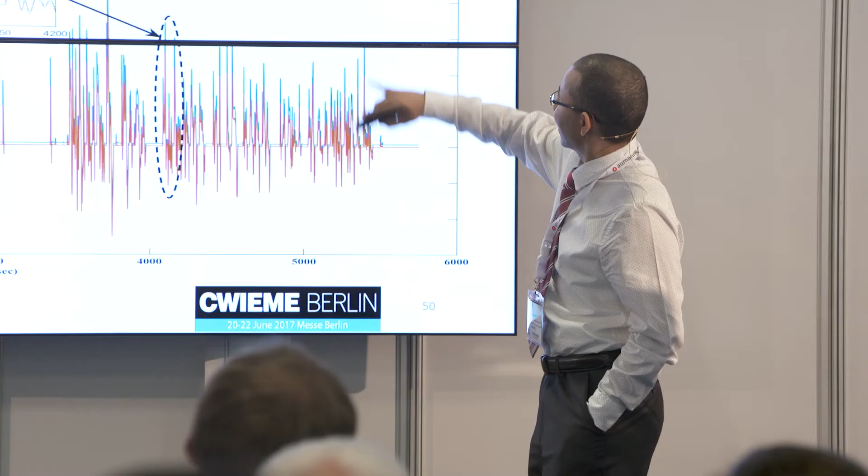You can see here that the power delivered from the wheel is the red one, and the red one... the blue one is the power required from the battery. So we design the battery, the system, and we get the battery power and the energy. And this is go and back, but they would like to have 12-hour autonomy.

It means that the bus should work without any disturbance for 12 hours. And as you can see, based on the co-design, we got...

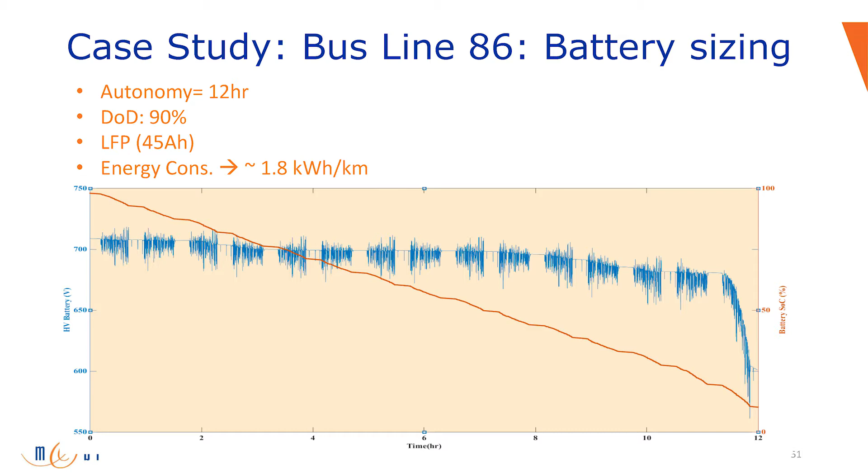LFP 45 ampere hour, and the energy consumption of this bus is 1.8 kilowatt hour per kilometer. And the depth of discharge, the range of the battery, changed from state of charge 100 to 10, meaning DOD around 90% operation. As you can see here, this is the trend of state of charge of the battery and the voltage of the battery.

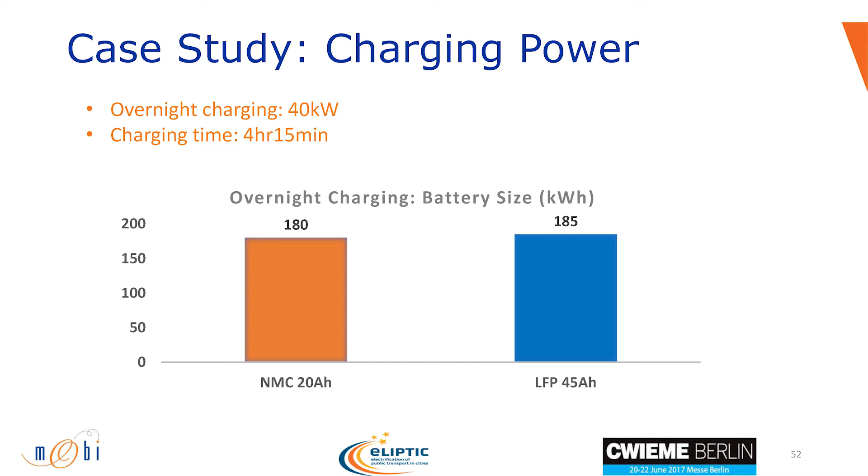And we came out with the design of the charger. If you are going to use these standard buses, we have 40 kilowatts that should be implemented at the depot, and we need to charge the buses in 4 hours and 15 minutes.

As you can see here, the trend of NMC, if you are going to use NMC battery with 20 ampere hour, or LFP 45, it's going the same. This is the same trend for calculation. We use another line, give the co-design, how we can make the design, and then you give us this calculation.

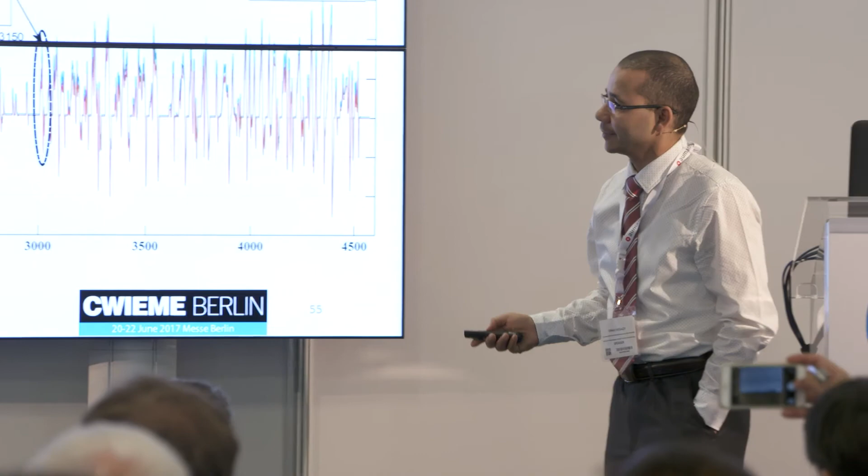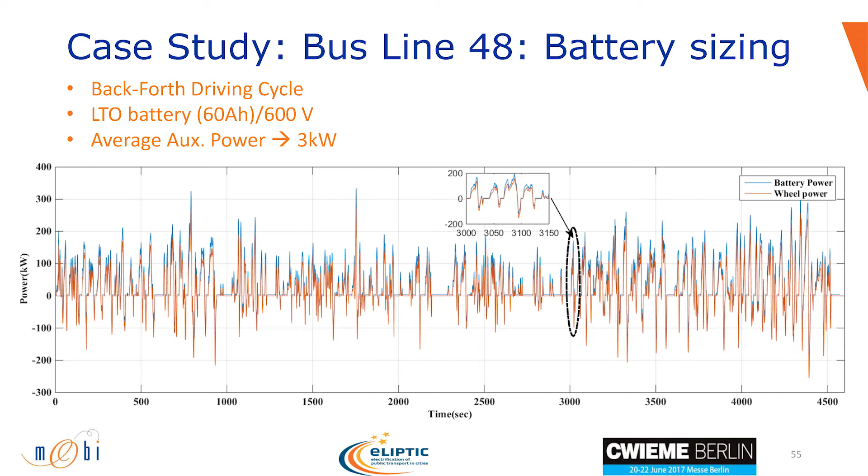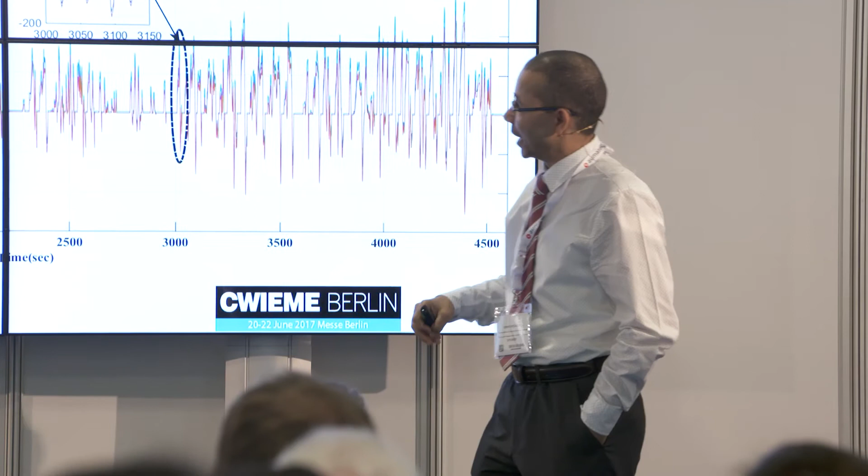And again with the heavy duty line, 18 meter, we did the same. We use the co-design to determine which battery type and also which battery voltage could be used. The co-design gives LTO as the best selection for on-road charger, because this one will be on-road charger, so you install the charging on-road at the terminal.

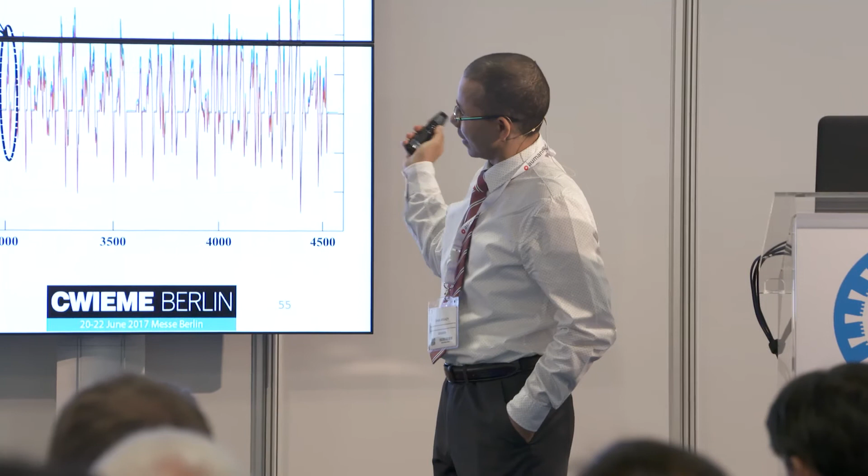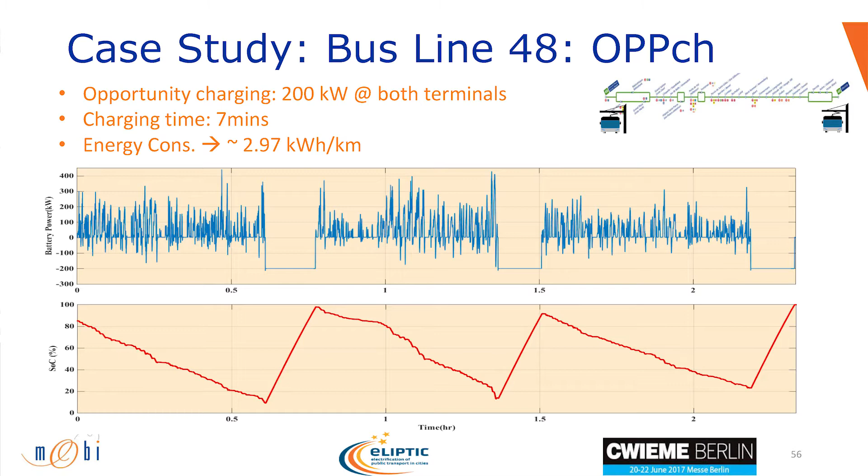So we have this back-force calculation, and then we have this integration of the charger, managing the charger itself. We can charge the battery with 200 volt, 200 kilowatt, and then you go to charge within the stop, and then you drive, and then you charge, and so on. This is the trend for this bus, and the charge time is 7 minutes, with power needed of 200 kilowatt.

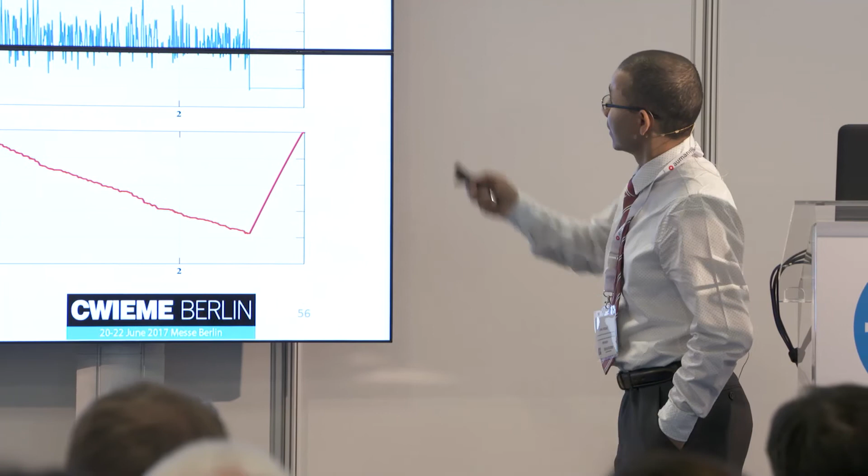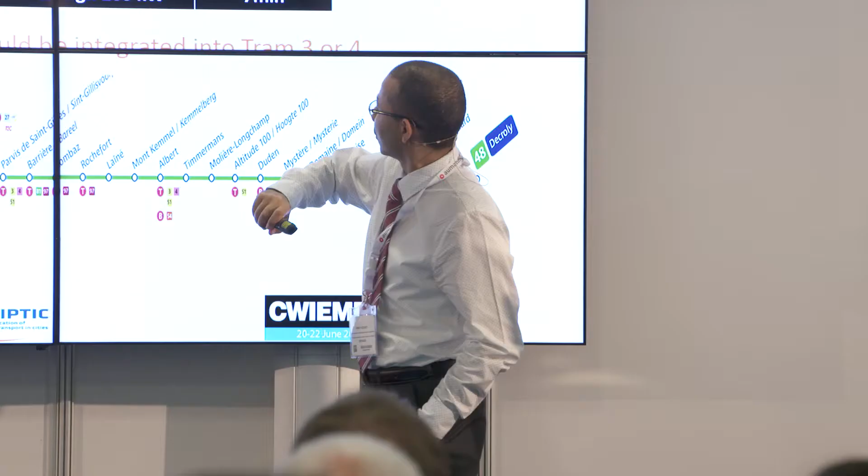And this is how we implemented the charger at the end, at the starting point. So this is a summary of what we have. For 2 lines, the standard one, we have overnight charger with 40, 60, and for online charger 200, and this is the trend of the charging point.